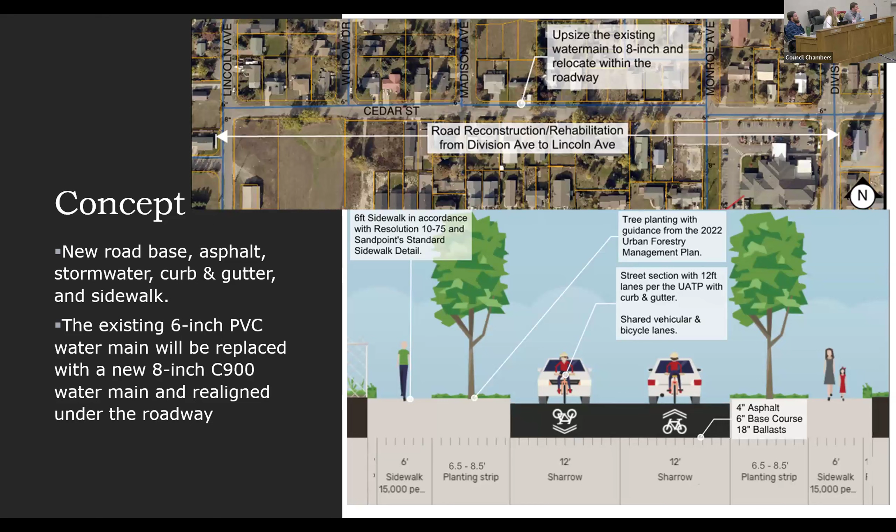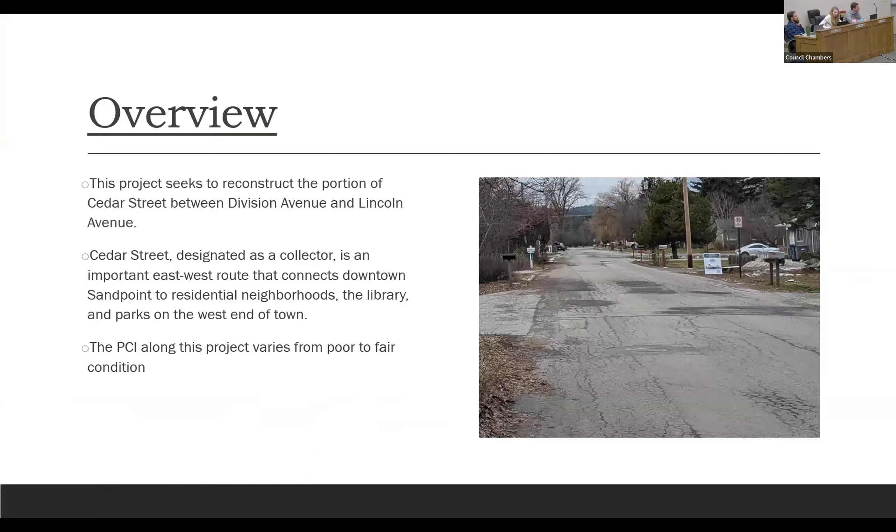Why I paused on this concept is that, again, this is the basis of our design. We do not have very clear cross-section standards in our code. I have an image here—this cross-section is a very technical looking street section of the prettier cartoon below.

This is from the UATP, the Urban Area Transportation Plan from 2009. That's since been updated, but it's full of typical street sections, and we use that as a guiding document when selecting what a street should look like. This was our guidance for this project: you've got a planter strip, two vehicular lanes, and sidewalk. So we've got a standard document, the Urban Area Transportation Plan filled with typical street sections, and then we have our codes—none of it is super clear.

I'll just give my personal opinion—I'm not a fan of that cross section. I ride the streets of Sandpoint all over, and I can tell you I do not like the shared bicycle car path. I don't feel safe on it. So for me, I would much rather put pedestrian and bicycle safety over the planter strip. Just the way I view the world, not saying the rest of the councilors do, but anytime you mix bikes and cars, bad things can happen.

Can I just add—the appropriate way, Ms. Holly was alluding to, is to have those typical sections adopted in engineering standards. We are in the middle of a project right now to provide standard details for all of these, not just cross sections, but sidewalks and curbs, which I've mentioned a couple of times. One of them is going to be those typical sections, and our plan is that it has heavy input from city council before they get adopted. So we can use those as guidance adopted by council, and the answer is we use those to design these street projects in the future. We're just not there yet.

That makes a lot of sense. Thank you. Council President, can I just ask Holly, can you maybe step back a little bit and talk about the intended timeline, what impacts changes to this typical section would have on that timeline, and where you see options for the council to guide you from this point forward?

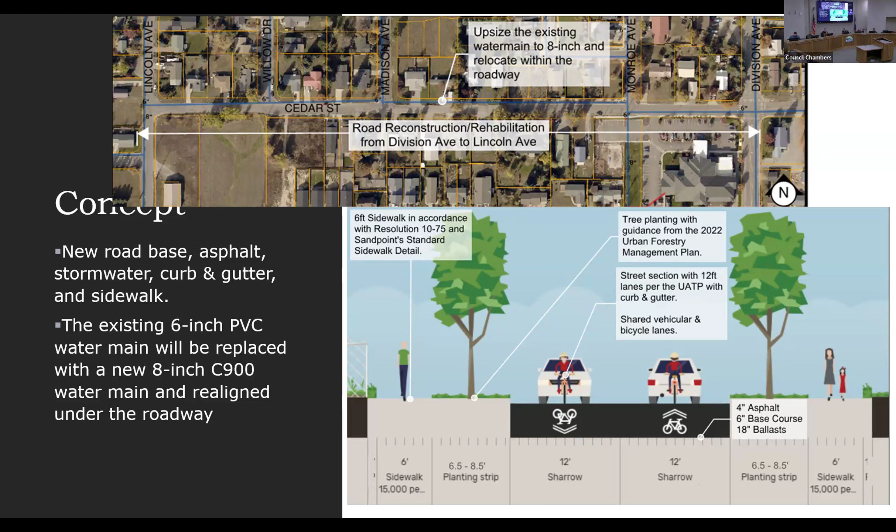So I'm going to ask Holly to continue through her presentation, and then we can save our discussion for when she's finished and move from there. Thank you, Council President. It's an update, so I do appreciate the feedback.

Back to this graphic, our intention was to get from Lincoln to Division with these improvements. We have some budgeting hiccups - our preliminary cost estimate came in around 3 million, and we have 1.9 million estimated. So we're considering taking out the block between Division and Monroe, since that asphalt is in decent shape. Those asphalt improvements and the intersection improvements at Division could also take place at the time of the Division reconstruction project. We're trying to evaluate, dig into our design and get our project in better alignment with our budget. With the full build out from Lincoln to Division, it was around 3 million. Taking out this block of improvements gets us down to 2.3 million, so we're much closer to getting within budget, but there's more work to do. Just an update that we're likely going to cut out one block of improvements between Monroe and Division.

Sidewalk, however, is intended to continue on that north side.

Madam President, Holly and Council, I'll just add that one of the other constraints we're facing - if you're familiar with the site, this west side runs along some Avista property. Stormwater becomes an issue here, and the solution to stormwater is to bring it all the way down to Lincoln and dig up Lincoln to put a stormwater pipe in and bring it down to Pine, because there's no stormwater pipe in Lincoln right now. We've had discussions with Avista about that open field next to the new apartments - that's where the historic sheet flow of stormwater has occurred to date, and we are trying to see if they would be amenable to a demonstration project of stormwater detention there that could serve as an educational demonstration and potentially alleviate the need to dig up Lincoln, which would be further cost savings. So we are in active discussions with Avista about how we could further reduce the cost of stormwater associated with this road improvement.

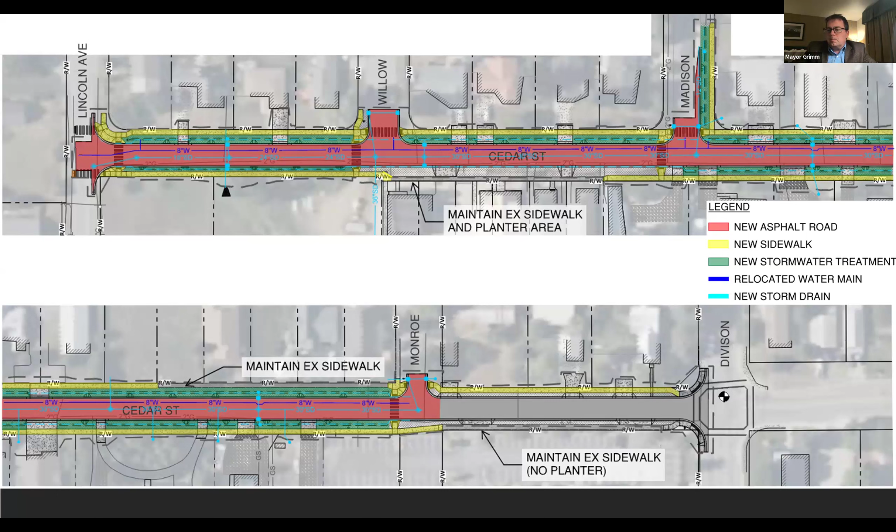Currently, the water main is not under the road, and it's going to be relocated under the road. This helps protect the water main. It's also currently 6 inches, and we'll be upsizing it to 8 inches.

The stormwater, as the mayor described, is very informal right now. A lot of the stormwater from the north sheet flows to Cedar Street, and then it has found many ways to find its way south through backyards, causing a lot of flooding issues. We seek to resolve that in this project by collecting the stormwater on Cedar and putting it in a pipe.

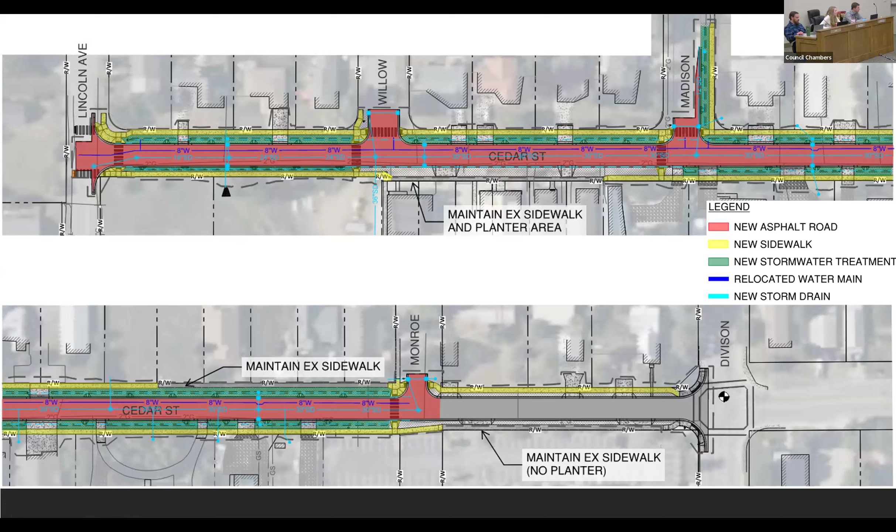So our next steps on this project: we need to finalize our stormwater approach - how are we conveying stormwater from Cedar Street to Pine Street? We have alternatives and need to select one. We'll also continue efforts to reduce budget. We plan to have a final design open house this spring prior to or with the project going to bid.

This project has been in front of PED and the Ped Bike Committee and the Forestry Committee. Both committees and commissions walked the project with the plans in hand. They'll have an opportunity to do the same with the final design.

This will also go to council for request for approval of the final design and request to bid the project in the spring, looking at summer construction. We're looking at potentially phasing this project because of funding constraints and construction constraints, but today the goal is to get it done this summer. And again, what we have budgeted is 1.9 million.

And that is the presentation I have. Are there any questions on the Cedar Street project? Madam President, Councilor Duquette, yes.

I have several comments. I think at one point we had talked about smaller than 12-foot travel lanes. I know that doesn't help you with the bike riding, but that would narrow what needs to be paved. I think Pine Street, as I asked you today, is 2 12-foot. They go crazy fast on Pine Street. I just hate to see that. And when I've talked to people on the street about that section, they think it's going to be a speedway with the new pavement and that size. That's just a comment I'm sharing. I am not an engineer.

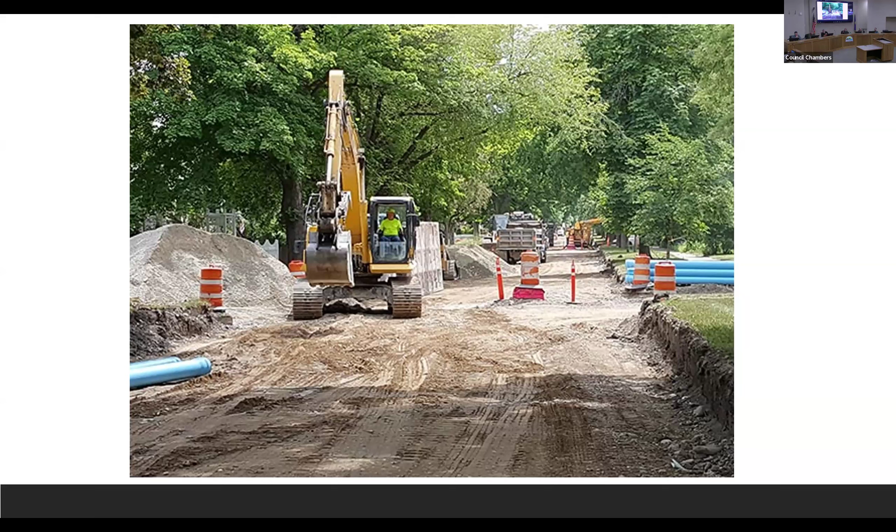We don't have enough space to shift our road far enough to avoid impacting the roots of this tree. So if we were to excavate adjacent to it, there's a strong probability this tree becomes a hazard and is damaged in the future. Also, in a road profile you can't have organic material—no roots allowed—you need rock for durability and drainage, so those roots would have to be cut out. The opportunities to save this particular tree just aren't available based on what we've seen to date.

Madam President—go ahead. I have numerous other comments and feedback, but being mindful of time, I'll send a separate email with my opinions and thoughts. So within the next week or so, I'll communicate with you.

Councilor Duquette, regarding the willow on the corner of Willow Drive, I looked at the location of that tree and I'm confident it can be protected during construction without long-term health implications, since it's far enough from the intersection corner to work around. The line drawn looked pretty close—it's a large tree and will require some protection during construction, but it's not right along the curb line, which would be more challenging.

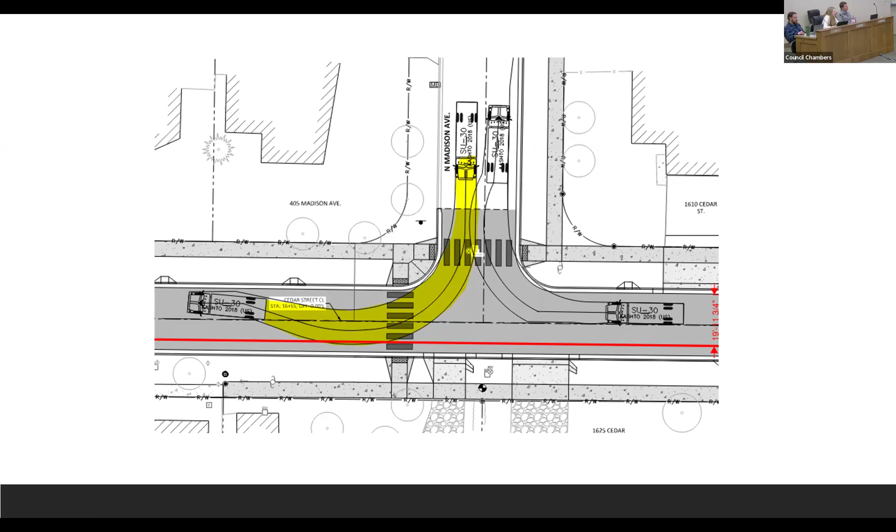And it sounds like we're going to have a workshop on this, so council will get an opportunity to have lots more input.

Okay, we will now move on to a resolution approving an agreement with the Local Highway Technical Assistance Council accepting Child Pedestrian Safety Grant funding for Phase 2 of the Division Avenue Corridor Safety Improvement Project. And again, we'll yield the floor to Holly. Thank you, Council President. This is the Child Pedestrian Safety Grant.

You'll remember this went to council for approval to apply for the grant. This is a state-funded grant. Fortunately, LTAC, the Local Highway Technical Assistance Council, found additional federal funding, and they were able to program many child pedestrian safety grant projects, including Sandpoint's.

So background on Division Avenue and where this project came from: the City of Sandpoint did a road safety audit on Division from Michigan to Spruce. That safety audit informed the multimodal transportation master plan.

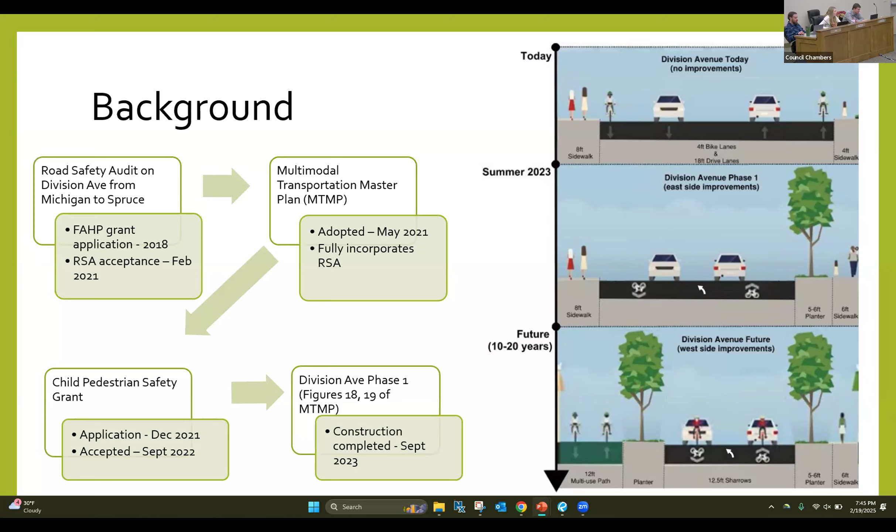In 2021, Sandpoint applied for a child pedestrian safety grant to implement part of this project, and that project was successfully completed early fall of 2023. There's a concept shown to the right, and the full future build-out envisioned for Division is at the bottom. This is kind of an intermediate project phase, and I'll get into more details.

Today, the existing conditions of Division is an arterial road, so it sees a lot of traffic, including truck traffic. There is narrow sidewalk, and often no planter strip on Division, so the sidewalk is directly adjacent to the roadway. There's also non-compliant curb ramps that do not comply with ADA. We also have over 1,600 students who attend school on Division, so many folks of all ages are walking along the corridor.

The picture here highlights our snow service and how, when we plow Division Avenue, often the snow goes right onto the sidewalk. We did do a pavement marking pilot last year to change our snowplow operations to use the road itself as snow storage. That's seen a lot of success. Our plows are not always able to keep the snow in the road - for example, earlier this year there was a very wet snow condition with rain and a lot of slush.

When the plows tried to just plow the travel lane, keep the sidewalk clear, and put the snow in the bike lane, it just came right back out into the road. So weather permitting, in the right snow condition, we can use the road for snow storage. But in that slush condition where it moves a lot, our plows have to put it off the road, which in this case means onto the sidewalk.

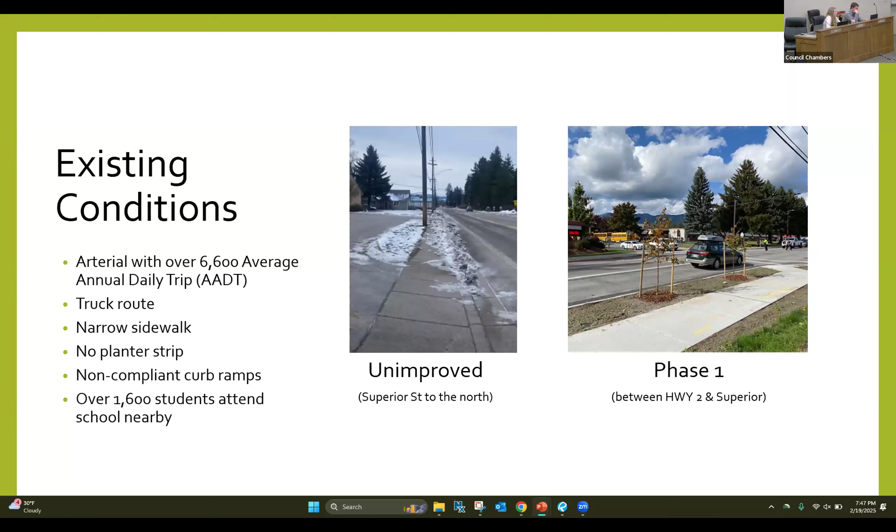The picture on the right is from the first phase of the Division Avenue project, between Highway 2 and Superior, where you can see the sidewalk is removed from the curb. There's now a planter strip providing a place to put snow in the winter and a place to plant trees. So Phase 2 seeks to pick up that first phase and continue north, making its way to Pine Street.

These are a couple pictures showing the challenges we have today - again, non-compliant curb ramps, a lot of ADA challenges, and very few trees.

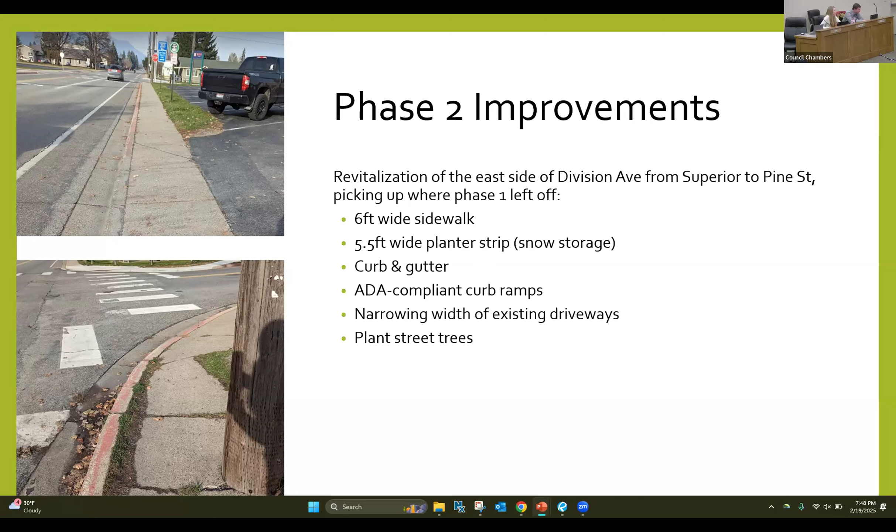Here is a map of Phase 2. As described, Phase 2 would pick up at Superior and fill in the east side of Division with a new sidewalk that's ADA compliant, including ramps, with a planter strip.

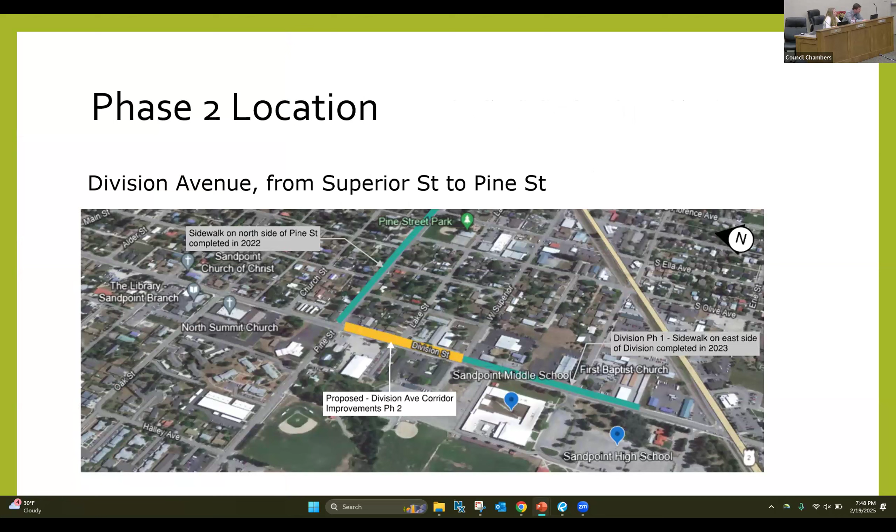So, information on the grant. The purpose of the Child Pedestrian Safety Grant is to address safety and mobility for children. Projects that are adjacent to schools often score best. It is administered by the Local Highway Technical Assistance Council, known as LTAC. The award for the project is $250,000.

As I discussed, originally when we applied for this grant, it was for state funding with very minimal strings attached. This is federal funding; however, Sandpoint will not be a direct recipient of those federal funds. LTAC will receive those funds and be responsible for them. The project must be completed by August 31st, 2026. Our goal will be to get this project done this summer while school is out of session.

Buy America will apply. There is no match required by the grant, but we do anticipate that this project will exceed the grant of $250,000. So the city has budgeted from its general fund for construction costs over that amount. And the request before council is on the screen.

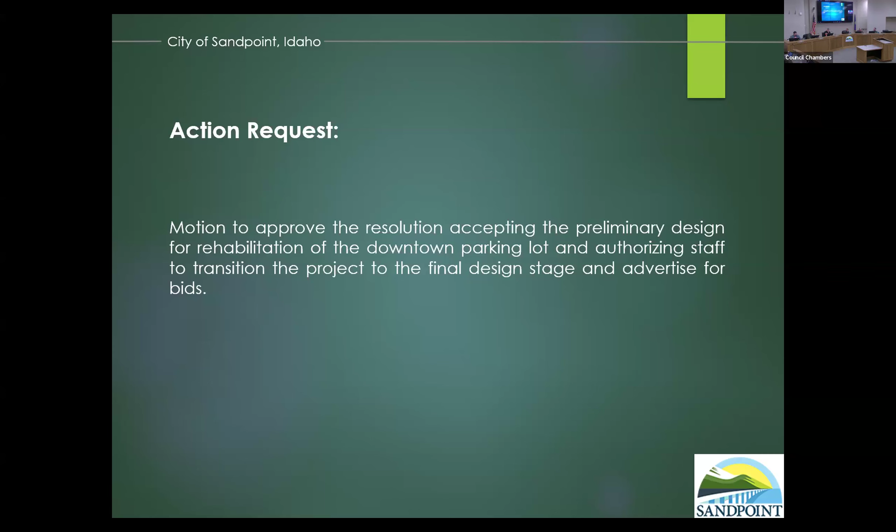Ms. Belfry's comments, and we have her papers here, were pretty compelling in some areas. Are these trees in the picture? I don't know if you want to pull it up or not. The 6 trees, are those going to be newly planted trees, or are those already part of the existing trees?

Yeah, I'm trying to see it on Google Maps, and I can't really. I believe it's 7 trees plus an 8th tree, which is the cluster of cedars. There's 3 in that cluster. I'm not a tree guy, but they're cedars. So that's the 8th, I don't know if you count that as one tree or not. Ms. Belfry said that there's no professional input from a credentialed arborist.

Councilman Spiro, if you don't mind me interrupting, I'd like to speak ahead to that and apologize that you were put in this situation today. One of the reasons I was so excited about our commissions and committees was that we could get qualified consensus from our experts. In this case, we haven't received that yet because it's preliminary design.

We will avoid in the future a situation where an individual commission member comes and feels as though the city's not receiving qualified input. That's the purpose of the tree commission. So in that regard, on this preliminary design, we would intend to call a special meeting of the tree commission to get their feedback and recommendation and consensus on the path forward regarding those trees.

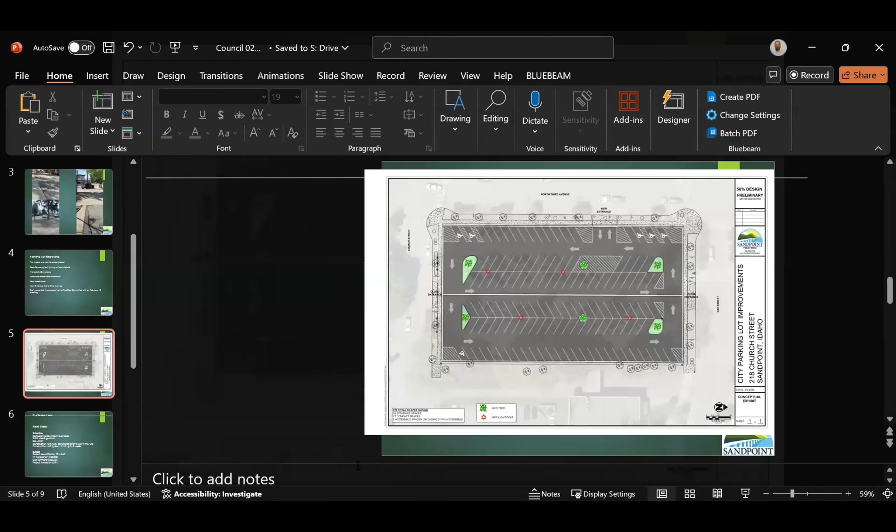If staff can pull up GIS or just a Google image of the parking lot, I want to point a couple things out related to the conflicts of the existing parking lot. Just any old maps - like Eric's pulling it up, just a second. Thanks Eric, let me see - I'm almost there.

Jeff Jones Square and Joel's Restaurant. If you can zoom out a bit. So right there on the north side, there's so much going on, and maybe you can zoom in a little on the north entrance. We've got literally the worst case scenario - two dedicated bike lanes, free-flowing traffic on Oak, a stop sign on 3rd, then cars backing out in front of Mr. Z's Taekwondo. It's just a recipe for an accident. There's just too many things going on, and people can't look at everything that needs to be looked at, including the sidewalk. If you're pulling out and going right on Oak, you're probably not going to be looking at the sidewalk, and people could walk in front of you. So lots of conflicts there.

And then on the south, similar - I go through that intersection multiple times a day, and because of the popularity of the great food at Joel's, you get so many people crossing from the north. You've got people crossing from the west. You've got the intersection, uncontrolled east-west, and then you've got people coming and going from the parking lot. I myself almost get in an accident there every week - not serious, but it's tenuous.

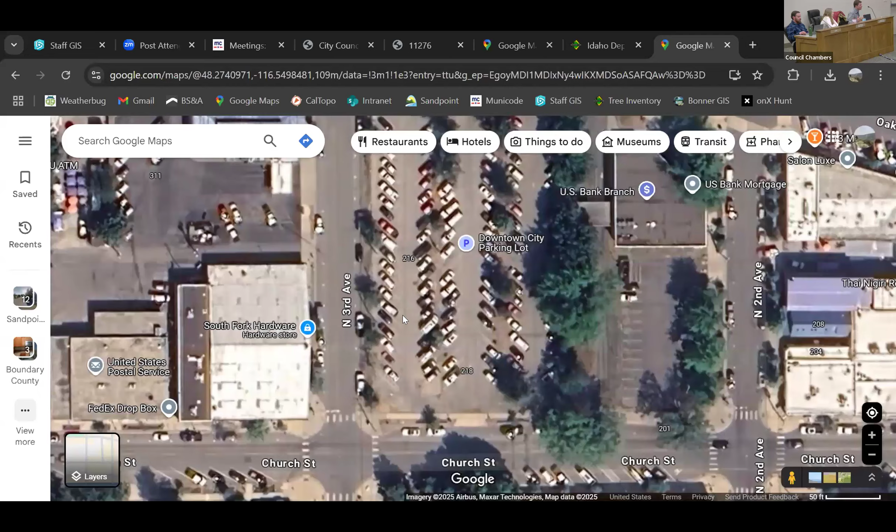Mr. Mayor, if I might - is it an action item? Should we just take a vote at this point for temperature, or what's appropriate? I think there's a fair bit of discretion here on how to proceed. If council wants to take a motion and vote, this council certainly can. If council wants to get an informal vote and make a decision and take a motion after that, that can be done as well.

Okay, Mr. Mayor, how would you like to proceed? I'd just like to go around the horn as presented, with feedback from the tree committee. What's your temperature? Would you be inclined to move forward, or prefer to combine it with another workshop? Left to right, which way do you want to go? We're going to start with Joel.

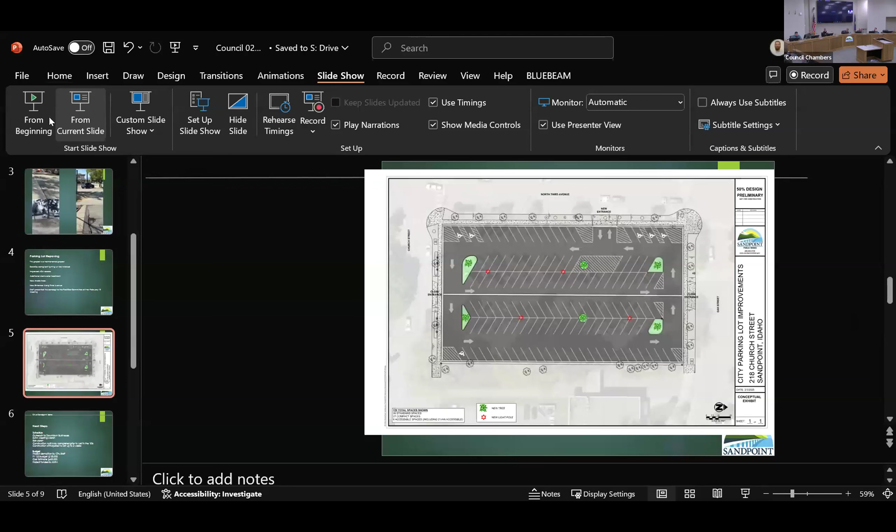All right, perfect. Real quick, I do have a quick question. Is there any electric car chargers going to be included? Okay, accommodation for the future, but nothing at this time. Okay, just conduits then, I forgot to ask that.

I personally am okay with the single entrance. Oak Street is pretty crazy when I'm with my kids, when we all come down on our bikes. That definitely gives me a lot of anxiety. Nothing has happened that I'm aware of there, and I'm very thankful for that. So, with respect, Mr. Howard, I understand your proposal.

With the tree committee discussion, I'm totally okay with moving forward to see whether it's possibly a better design, and if we can save some trees, or how many parking spots we're going to lose with keeping some of the trees. I think that discussion will be helpful. But with closing the two sections, I'm okay with that.

You're definitely going to get some grumpy truckers that pull trailers right into Church Street, into the parking lot. They park there, run across the street, get some food. But again, this is a bigger picture, so I'm okay with moving forward with more input from the tree committee, personally.

Councilors, if I may, just one quick comment. There is the option to continue with repaving the parking lot without removing the two existing entrances. That portion can always come at a later date. We can include the Third Street entrance perhaps this fall, if that was a desired path, and leave the two entrances that are there currently. It wouldn't, aside from traffic flow inside the parking lot, have minimal impact on the layout as you see currently.

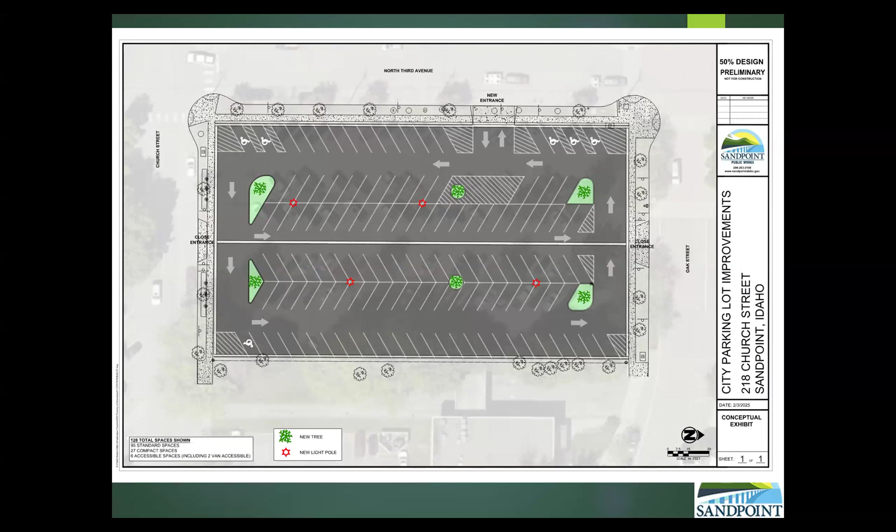Councilman Dick, this is Jeremy, the Mayor. Not really, really looking at it, just due to the extensive deliberations, discussions, lack of obvious funding. I was looking for a quick, simple project to start to make our community look nicer and show that we care about our infrastructure. So I'm not of the mindset of letting perfection be the enemy of good. I'm really looking at what can we do that's practical, that reflects our investment in our public spaces and can be accomplished. So no, haven't looked down that path at all. Totally understandable, I think I would concur with Councilor Aispuro too.

I would enjoy hearing the recommendations from the tree committee as well before moving forward. But I definitely would like to move forward on this project as soon as possible.

Thank you, Councilman Dick. I agree that input from the tree committee would be important as we go past preliminary design. I'd like to point out that Sandpoint is a walking-friendly town full of bikes, and closing both entrances puts the priority on pedestrians and bikers, which is very important downtown. Yes, there will be some inconvenience for cars circling, but I see plenty of cars circling in box store parking lots just to get the spot next to the front door. So I don't think it's that huge of an inconvenience, and it will keep our bikers and walkers safer. I would lean toward moving forward with preliminary design.

Councilwoman Duquette: I, of course, am going to go for saving the trees. I have the data from the IDL, all the pounds of pollutants removed, all the CO2 sequestered. I have it listed, I won't read it off. And the cubic feet of runoff for those trees, the cedar group. This picture shows where the cedar group is, where that new tree is going to go. These two at the Oak Street end are where the spruce are already, and the one in the middle on the southeast parking, that new tree, is where the lodgepole already is.

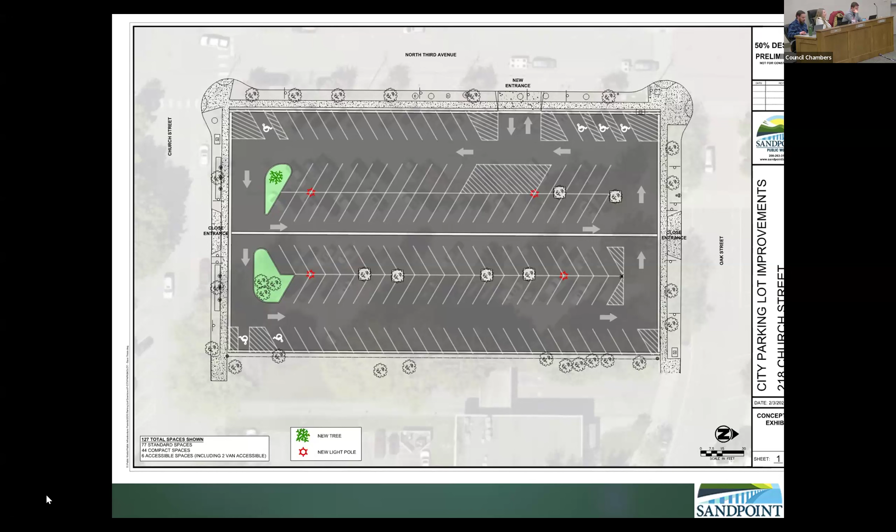Council President, Councilman Aispuro: how many spots are you losing keeping this layout? Are you losing any? We do have a reduction in spaces. Bear with me, I've got a bar blocking my screen. Brandon, can I jump in?

The location of the existing trees on this exhibit are not in the exact same location as where I showed the new ones on the other exhibit. They're in the same area, but moved a little bit in order to provide an adequate turning movement at the end of those bays.

If council wants to direct us to move forward with a design keeping the trees, that's absolutely possible, it's not unfeasible. But so that you're aware of the trade-offs: we don't really lose total parking spaces or a significant amount of them, we might lose a couple. But there are two big factors. One of them is the turning movement at the end of those bays will continue to be inadequate.

Secondarily, you can see the 4 trees on the eastern middle row, the 4 white circles there. Those are the 4 existing trees that would be saved. We would build some planters around those, and we could still put parking spaces next to them, but a significant number of those spaces would need to be compact. So not just the entire row along the far east corner would be compact—we'd add another 15 to 20 additional compact spaces.

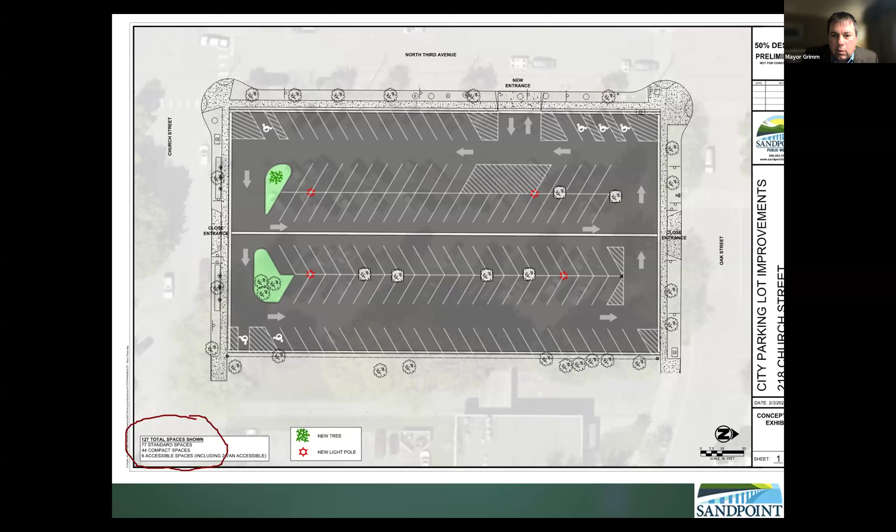In regards to the closures, if this doesn't work, we can always blast open that North Oak Street entrance as a second exit or entrance. We still don't know how the parking metering and fee is going to be implemented and what technology, but just wanted to be transparent with Joel, Dick, and Deb. If this is a tie vote, I would instruct staff to go to the tree commission and work up their recommendations and any other feedback the council has, not to be disrespectful, that we can incorporate, but to move forward as quickly as possible.

Council President Ruehle, sorry. Yeah.

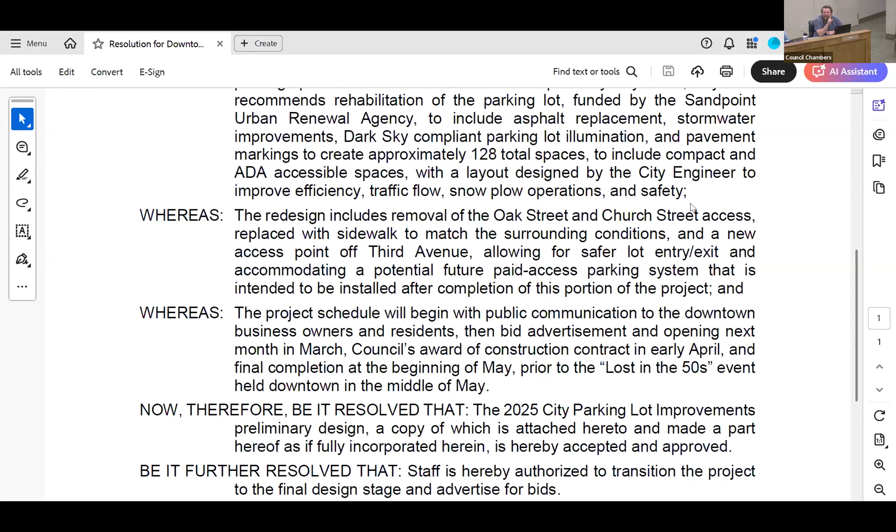I just wanted to add one clarification about the circulation around the trees. I agree that comment wasn't phrased fairly. I want to point out that regardless of whether we save the trees or not, we intend to have a curb between the asphalt and the sidewalk, regardless of whether that turning movement is large enough to keep people from driving on the sidewalk. So we're always going to have that discussion of progress versus preservation.

Okay, I will entertain a motion to approve the resolution accepting the preliminary design for rehabilitation of the downtown parking lot and authorizing staff to transition the project to final design and advertise for bids.

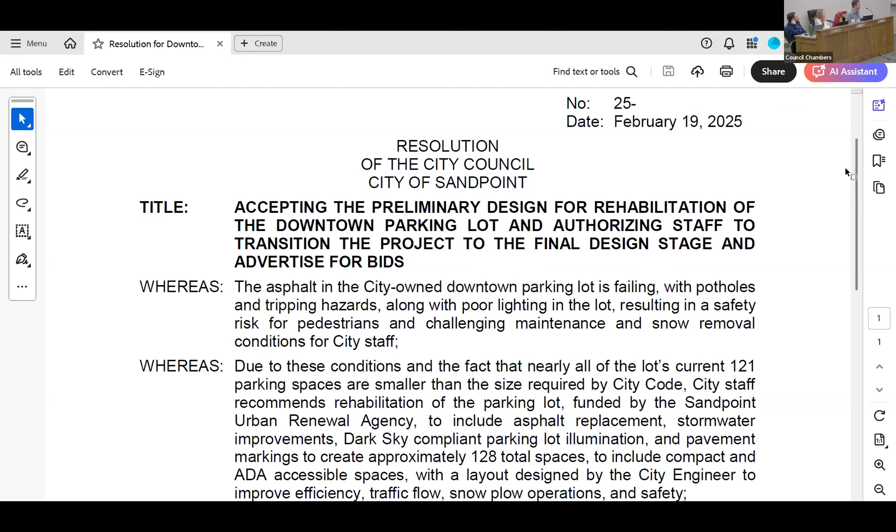Earl, can I interrupt for a moment? Can the mover just consider the resolution on the board? There's been a lot of discussion. The resolution contemplates one entrance and approximately 128 spots, as well as a handful of other significant provisions. So can the mover consider that when making the motion, so they understand they're not just voting on this resolution. I'm not sure I'm following you. Do you want me to reread part of this as the resolution? Council President, you don't have to reread anything. Okay, because you asked to entertain a motion. My suggestion is that the mover consider the resolution, because if they just move to approve it, it will be for what's on the board right there, unless they amend it or amend the motion.

The key points I see, and staff can add to this, are the approximately 128 spots and the one entrance. Can she amend, can she make a motion in addition to that? Anybody can make a motion they want at this point. I just want them to consider that, what they're moving for.

Have I overcomplicated this? No. Nobody has made a motion. No motions on the table yet. I thought somebody just made a motion. No, she said she would entertain a motion. Entertain a motion. I apologize, I was looking for a first and a second.

If somebody makes a motion to move forward with the proposal to final draft, in accordance to going into the tree committee for further discussion on either adding another entrance or not taking away, only making it one entrance. I really don't know how to legally put it. Yeah, that's the tricky part.

We discussed moving forward to the tree committee. I heard Mr. Mayor say it may not even come back to us. So at the very least, I make a motion to move forward with the final design, but in connection with conversations with the tree committee.